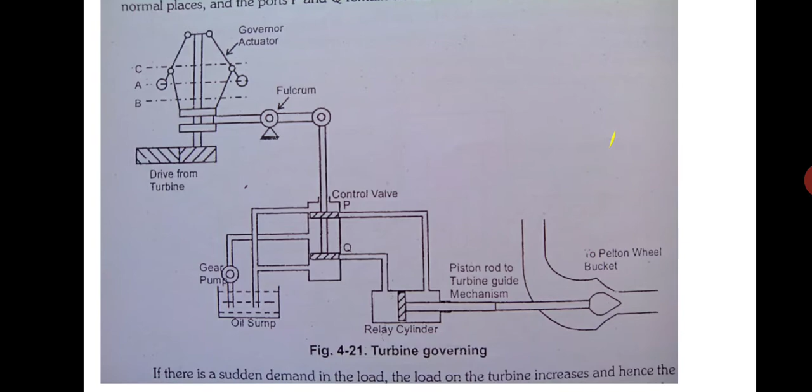Hello students, now we shall look at the turbine governing. Basically, governing means - you have governors in diesel engines also. The governors are the equipments used to maintain a constant speed irrespective of the load and gradient. This comes in diesel engines.

In this power plant, governing means - what can we govern here? Only the supply of water to the turbine. So either we can increase the supply to the turbine or reduce the water supply to the turbine. Why does it have to be done? Because if the load is more, suppose the demand of electricity is more, then more water has to be supplied to the turbine. And if demand of electricity is less, then less water has to be supplied to the turbine.

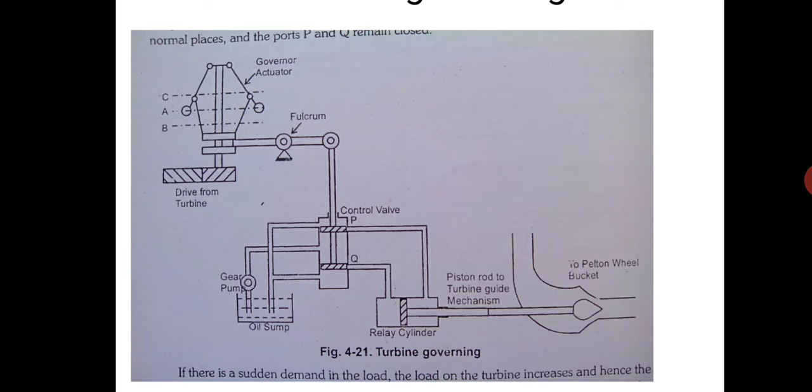Now how is it done? These turbines are very huge, and even the nozzle here, you can see this is like a Pelton wheel. Even in our institution, in our fluid mechanics lab, you have got a Pelton wheel, and you have got this spear which controls the flow of water through the nozzle. In our lab, that spear is controlled by a wheel, manually increased or decreased by rotating it clockwise or anti-clockwise.

But in real practice, as we have told, the 50 megawatt plants we have seen in Kaiga, Kadra as well as in Supa Dam are very huge. They cannot be operated by hand, so they have to be operated mechanically. And how are they operated mechanically? They are operated by hydraulic oil pressure.

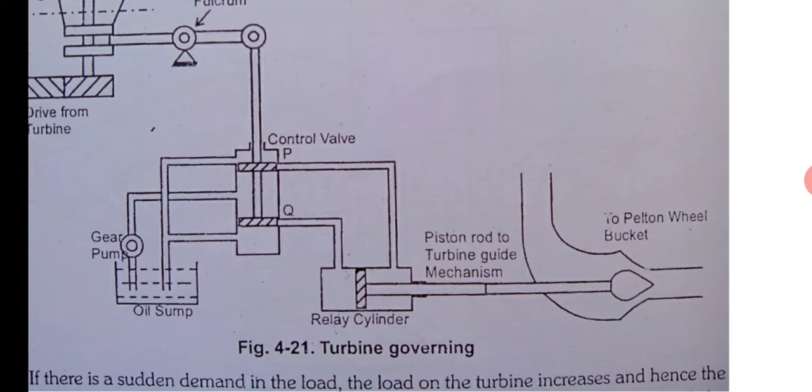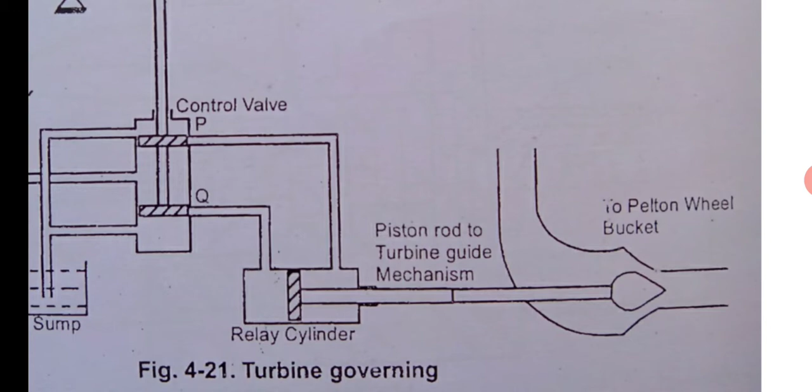Now you can see the spear here. If the oil is supplied from the left side of the piston, the spear will go inside and the flow will be reduced. If the oil is supplied from the right side of the piston, this relay cylinder, then the piston will travel towards the left, and the spear will come out, and more water will be supplied to the Pelton wheel. Now, how is this movement of the relay cylinder done?

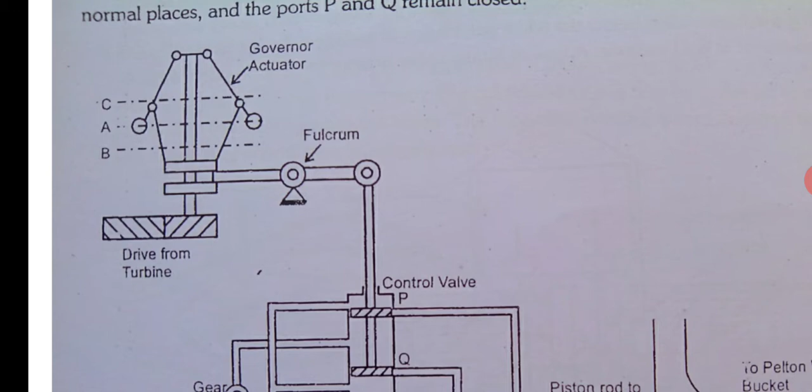It is done based on the speed. This is known as speed governor, and the same speed governors are available - you can see that governor physically in our design engineering lab, which is taught in final year. I think you will be studying this design engineering lab where you have a governor. What is a governor? Very simple it is.

Here you have got a drive from the turbine. Mechanical drive is there, so two gears are in mesh, and this drive is coming from the turbine. Now, if the turbine is rotating slow due to extra load, then the turbine will start rotating slow. When the turbine starts rotating slow, these gears also start rotating slow because the drive is taken from the turbine. As these gears rotate...

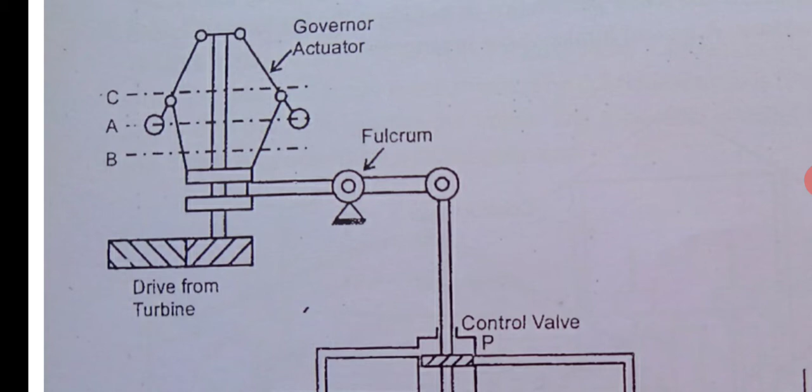Because of these gears, the governor is at three different positions: A, B and C. These are the weights, hanging - these two are the fly weights, and this entire thing rotates. If the speed reduces, then the fly weights come down to position B. If the speed of the turbine increases, then it goes to position C, and at normal speed it will be at position A.

So you have got three different speeds: one is slow speed - if the turbine is at slow speed, it will come to B. If at normal speed, it will go to A. And if the turbine is rotating at high speed, it will go to C. Now, at this center, you have got this shaft.

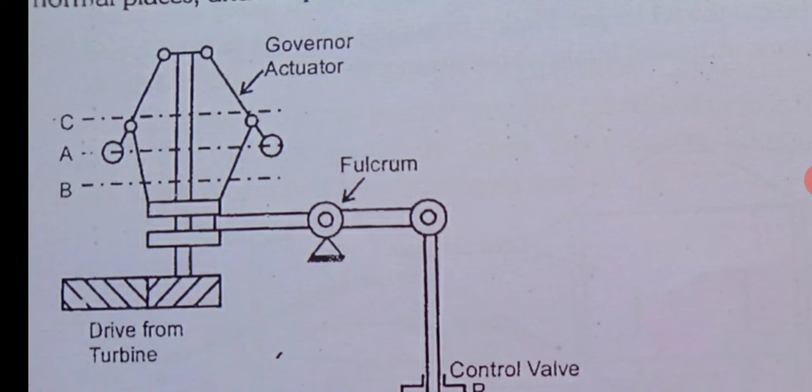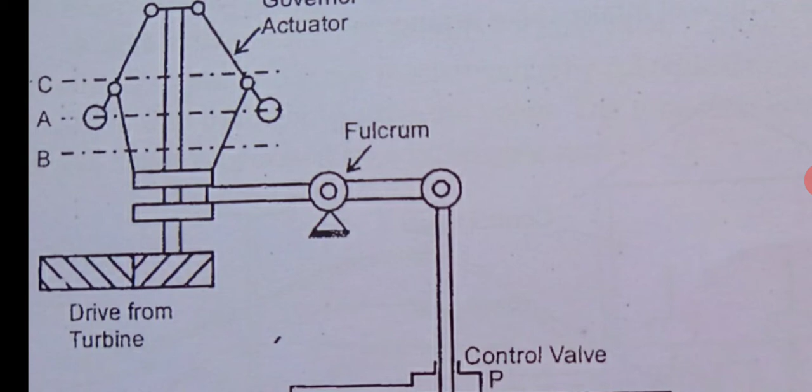Now you can see the center shaft - because of these fly weights rotating, this shaft will either go up or come down, and this entire assembly will go up or come down. This is connected to the fulcrum, and this fulcrum is connected to the control valve. Now you can see this control - P and Q - this is a control valve. So what happens? Because of the movement of this sleeve, the fulcrum rod is actuated, and these control valves are actuated.

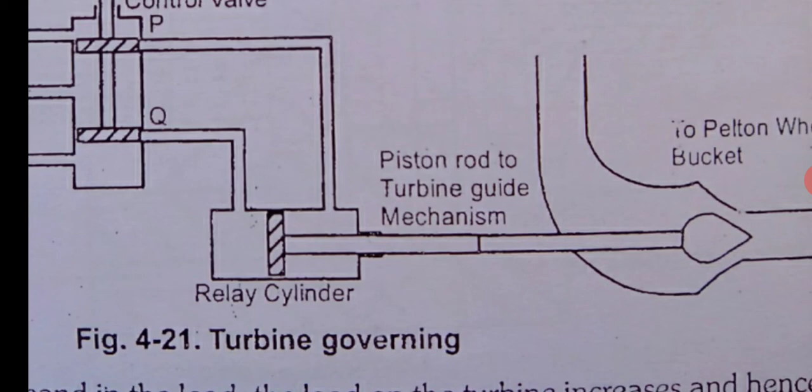So what happens - the gear pump which is producing oil will supply the oil, and accordingly the oil will be supplied either to the right side of the relay cylinder or to the left side. If supplied to the left side, the water supply to the Pelton wheel is reduced. If supplied to the right side, the water supply to the Pelton wheel is increased. This is known as governing.

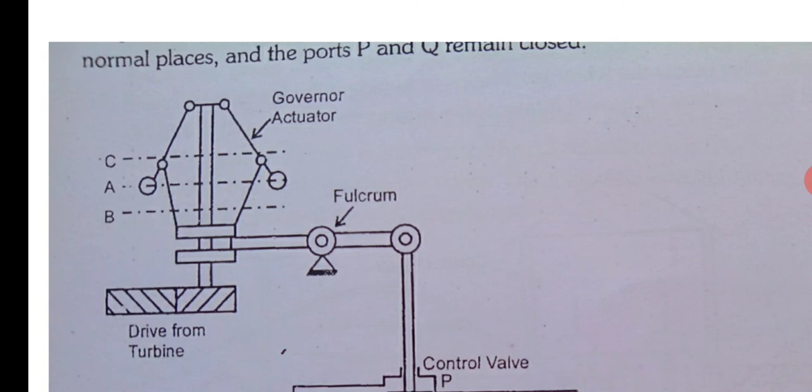Very simple - this is a mechanical governor based on fly weights only. As the speed increases, the fly weights fly away; if the speed reduces, the fly weights come inside. You have seen the three positions, and this movement of the fly weights ultimately controls the flow of water to the turbine.

This is known as turbine governing, especially when there is a sudden load - okay, sudden reduction in load or sudden increase in load. This comes into picture. Okay, thank you.